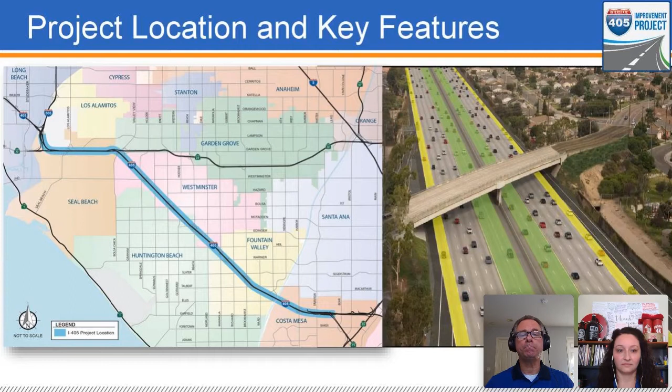Now I'd like to talk a little bit about the project benefits. We are, as part of this project, replacing 18 bridges. We are adding a connector between State Route 73 and 405 for the express lanes explicitly. And we're widening several bridges over roads like Beach Boulevard, Harbor Boulevard, and a couple of railroad crossings as well. All of the interchanges are going to be reconfigured. I'll talk a little bit more about Brookhurst's reconfiguration later on in the presentation.

There are merge lane improvements. We're making improvements to arterial streets. We're replacing a lot of sound walls throughout the project. We're building approximately 170 walls total. There'll be new bike lanes and sidewalks on most of the bridges, actually on every bridge, except at the very north end of the project. We will only have sidewalk on one side of the Bolsa Chica Bridge.

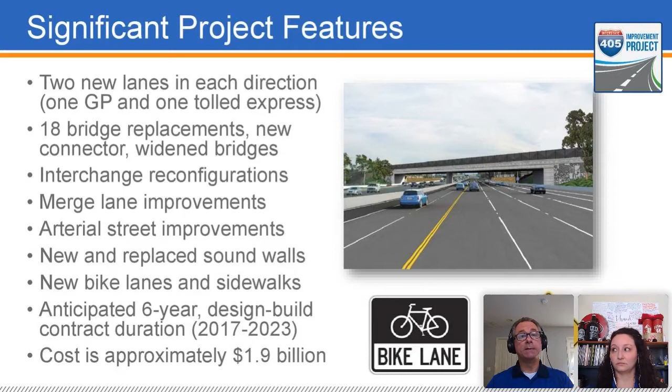This is a 6-year design build project. That means design and construction happen concurrently. Design is just about completed though, and we are about 40% of the way through the construction schedule as it stands. And the cost of the project is approximately $1.9 billion.

So now I want to talk a little bit about the bridge map. This is a document that we've included in the file section. It's a bridge map and fast facts. If you see that, it's actually a 2-page document.

On the front is a map like what you can see here, and it shows a graphic that represents what year construction is anticipated to begin for each bridge within the project limits, and whether that bridge is a 1-stage or 2-stage bridge. 2-stage bridges are open to traffic during construction.

The second sheet on the PDF that you have in the resources section details bridge by bridge the improvements that are going to be included in the new bridges. So it tells you whether it's going to go from X number of lanes, like 4 to 6, and talks about whether there are existing bike lanes or sidewalks in each direction, and what we have new. So it's a good resource.

So at this point, we've begun construction on the bridges shown in blue and purple. One of those, Slater, has been completed, as you know. Of the other bridges under construction, 3 are 1-stage, 3 are widenings, and 6 are 2-stage bridges.

And then we'll have another one under construction here soon. As I mentioned, Brookhurst, we will also have the Edinger Bridge under construction soon.

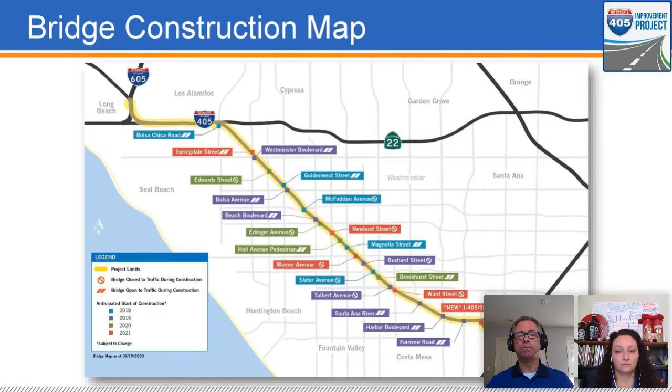At this point, I'd like to provide a bit of a construction update. These next several slides show activities from the last several months. More than 70 walls are under construction or completed.

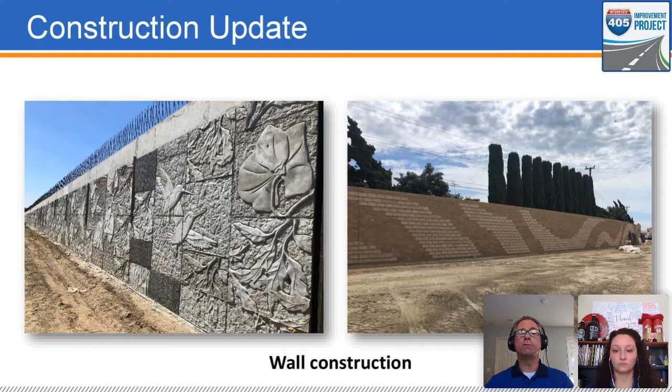These 2 photos reflect some of the aesthetic patterns being placed on retaining walls and sound walls.

This slide shows the Santa Ana River Bridge, which spans both the river and Euclid Street in Fountain Valley. This bridge is being widened using precast concrete girders.

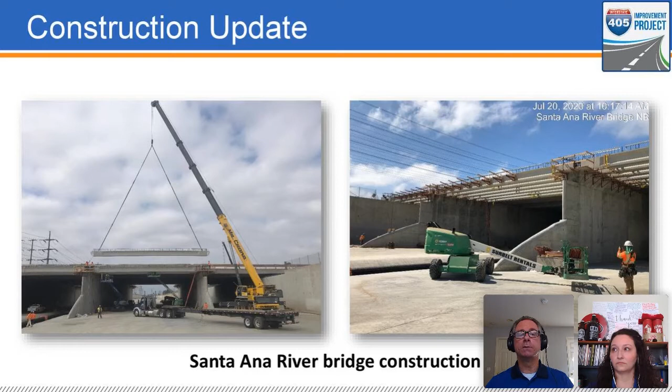This slide here shows drainage being installed in the photo on the left, and the reinforcing steel for a concrete barrier and concrete pavement in the photo on the right.

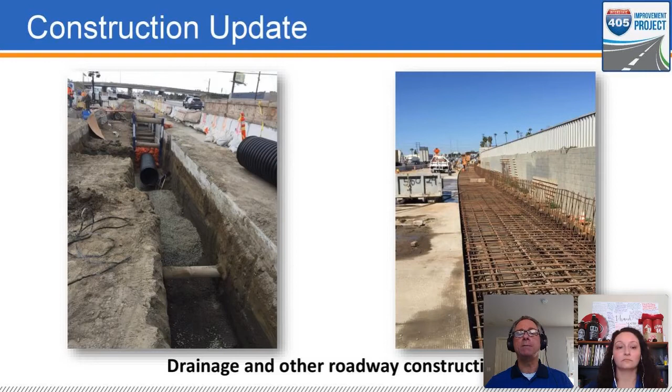These photos show bridge construction at Talbert Avenue and Westminster Boulevard. The photo on the left is of the false work at Talbert Bridge. We've advanced beyond that point. False work there is complete at this point, and they will begin in the near future pouring the actual superstructure of the bridge.

The photo on the right shows the placement of reinforcement steel that's inside the Westminster Bridge. All bridges are built this way. There's just a ton of steel reinforcement bar that goes in there. They pour the concrete, and it forms this bridge that lives up to current standards.

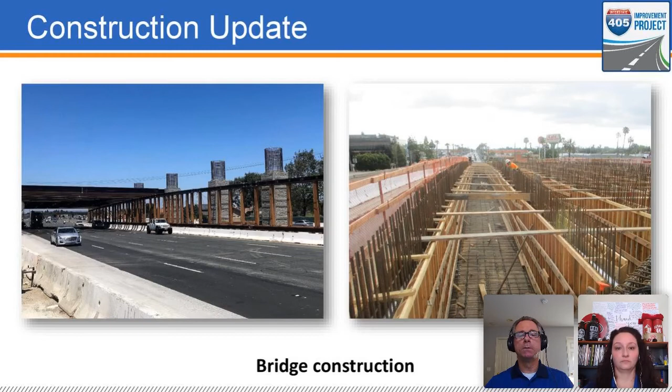Now I just want to look ahead a little bit for bridge construction. As you can see, and as I mentioned before, the project construction is more than 40% complete. The design builder has anywhere from 700 to 1,000 workers actively involved in the project on any given day.

We've opened the first halves of Magnolia Street Bridge, Bolsa Chica Road Bridge, and Goldenwest Street Bridge, and we did that earlier this year. And work on the second halves of those bridges has begun.

Work also is well underway to reconstruct the Heil Avenue pedestrian overcrossing. You'll see some activity there on the southbound side of the freeway in the coming weeks when they install a large cast-in drilled hole pile.

That's where they basically install this steel casing and excavate out the dirt that's within it and put a rebar cage, a reinforcement steel bar cage, inside that casing, and then pour concrete in. It's one of a couple of different ways to create the foundation for bridges, for bridge sides and bridge center columns. In the coming weeks, the McFadden Avenue and Bushard Street bridges are expected to fully open to traffic.

I'll talk more about Bushard in a second. And then work is set to begin on the Brookhurst Street Bridge, as we'll talk about today. And toward the end of the year, we expect the first phase of the Westminster Boulevard Bridge to open and the second phase to begin.

And looking into next year, Talbert Avenue Bridge is expected to fully open to traffic in spring. That'll be followed by demolition and reconstruction of the Ward Street Bridge. In addition, we anticipate the first phases of the Fairview Road and Bolsa Avenue bridges to open and work to begin on the second phases.

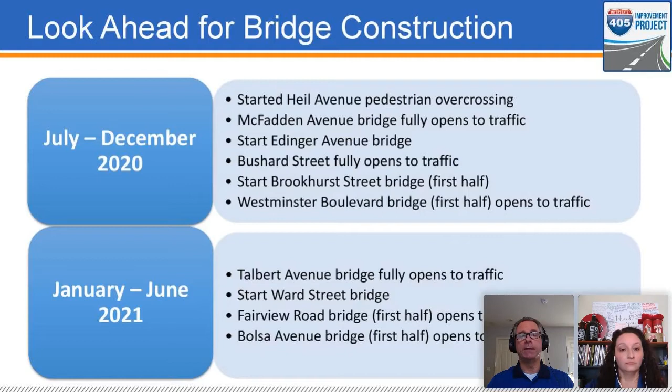Right now, I'd like to talk a little bit about Brookhurst. I'm going to take a sip of water first, though.

So OCTA and the contractor are always looking for ways to advance the construction schedule. We've worked closely with the City of Fountain Valley on this, and we've worked closely with all of our city partners, as well as Caltrans.

As part of this effort, the city has agreed that we can begin work on Brookhurst after the Bushard Street Bridge is completed. Bushard is set to open this coming Monday, October 12th.

Initially, the plan was to begin Brookhurst after both Bushard Street and Talbert Avenue bridges were completed. As part of this scheduled advancement effort, an analysis was done on the impacts to traffic of constructing the first phase of Brookhurst concurrently with completing construction at Talbert. That analysis showed concurrent construction would be feasible with Bushard open and with signal timing adjustments at area intersections, and the overlapping construction is only expected to last a few months.

As I mentioned earlier, the Talbert Bridge is anticipated to open in spring of 2021. It's also important to note that Brookhurst is a two-stage bridge that will be open to traffic during construction, with 2 lanes open in each direction for the duration of work. The anticipation is that each phase will take approximately 16 months to complete, so 16 months for each phase of Brookhurst. That's a conservative estimate, but we've learned over the last couple of years that we need to be conservative because there are a lot of things that can impact the construction schedule.

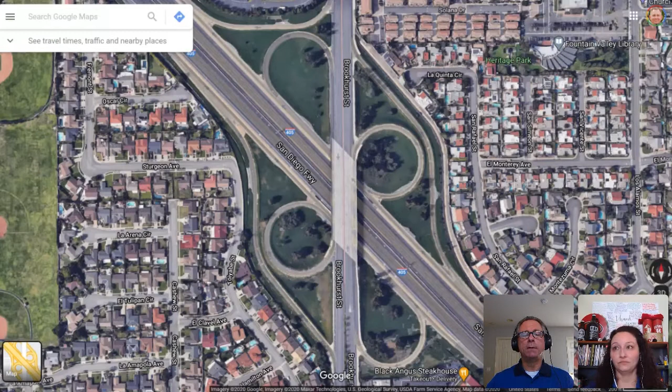All right, so this is the Brookhurst Interchange. I just want to make sure everybody can see it. As I mentioned, there is some activity going on right now, as you can see if you're out there, where they've removed the center median — that's the entire center median through here, and they're removing it all the way through the entire bridge. The plan is ultimately to shift traffic to the west side of the bridge, all the way through here, and there'll be 2 lanes of traffic in each direction.

As part of the work that's going to occur, this will happen Monday night into Tuesday morning. These loop off-ramps here are going to be eliminated — this one here, and this one up here. So those ramps get eliminated, and meanwhile they'll have temporary ramps here where you'll come off and be able to turn left or right. Actually, I apologize — only left from this ramp. This straight portion of the ramp stays, so you'll be able to go northbound on Brookhurst, but we're putting this extra temporary ramp in so you can turn left and go southbound on Brookhurst.

The same activity will be occurring here. So by the time everything opens up Tuesday morning, if you want to exit, you'll be exiting the freeway southbound here and be able to turn left to go with traffic northbound on Brookhurst. Again, these 2 ramps here will be eliminated, this one and this one up here, and that's to allow for safe movement of traffic and for construction of this side of the bridge.

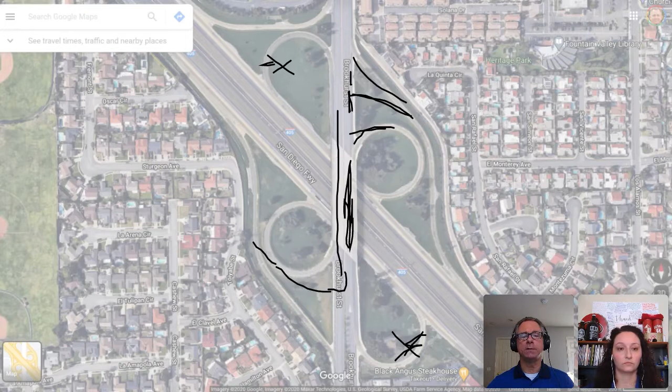They're creating a work area to do this side of the bridge. This loop on-ramp remains and you'll still have access to it — it'll be slightly realigned, so you'll be making a sharper turn to get on. The same applies here; I don't think there are any changes to this ramp, but it stays open as well. I'm going to leave this up, but mention a couple of other things as we move through here.

If you notice on the slide, I was talking about the demolition activity that's going to come next. Once traffic has been shifted, there will be a few days of pre-demolition work. That includes poking holes in the bridge deck and removing what's known as lost deck — the wood forms used during the initial construction of the bridge back in the 1960s. When you're doing bridge construction, the superstructure itself that you're driving on isn't one monolithic piece of concrete and steel — that would be too heavy and wouldn't be supportable. So there are cells created within the bridge, and wooden forms are used to create those cells.

Then the steel bars are put in there, and the concrete is poured around those cells. So you have these open spaces in the bridge, and that allows the bridge to be supportable. Once they remove that wood, they don't want it mixing in with the demolished material, because the demolished material is actually recycled — not the steel, but the concrete is taken to a batch plant nearby and recycled. So they don't want to mix wood in with that.

Once that work is done, the first half of the bridge will be demolished. The plan is for that work to occur over two weekends: first on the night of October 17th, and then again on the night of October 24th. These are tentative dates, but that's the plan at this point.

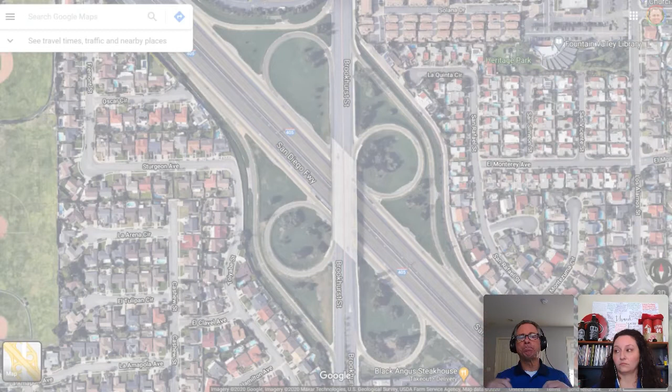In the case of bridge design here, what I want to talk about -- you see on your screen Brookhurst, and what you have is this loop off-ramp scenario. When they close these for the traffic shift, that's a permanent closure. These off-ramps are not coming back.

What's going to happen is this off-ramp is going to be reconstructed here, and it is going to come to a T intersection, where you'll be able to turn left or turn right from this off-ramp. These loop-on ramps will remain the same. Again, it'll be the same over here, where it'll come to a T intersection -- you'll be able to turn right or turn left, and that's the final permanent condition of the bridge.

This slip ramp will be removed. That's actually safer for motorists, bicyclists, and pedestrians.

Many of you, I know, have exited Brookhurst here, as I have, tried to get over to the left lane to turn left on Slater, and you're merging with a bunch of vehicles, maybe with a pedestrian you have to be watching out for, or bicyclists.

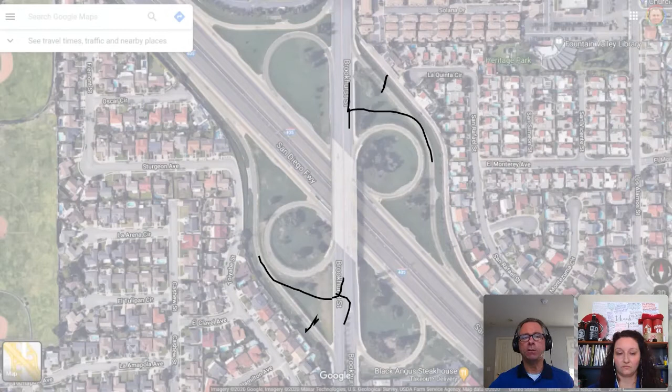This new design isn't entirely new, but implementing this type of design addresses that merging and weaving issue, and frankly, the increase in traffic on our streets and highways. That's the main element there.

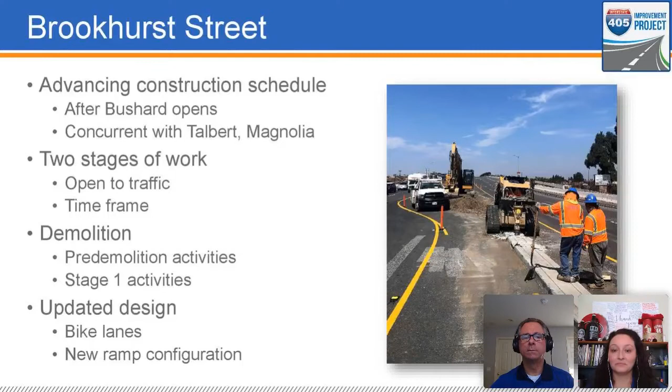So I went through this list of items. I want to talk a little bit about our engagement strategies. As you can see, we connect with the community in several ways. Many of you probably already receive a lot of our communications, in print and electronically.

While we prefer face-to-face discussions for major updates like this, we will continue conducting these meetings virtually for the foreseeable future. We strongly encourage you to sign up for bridge-specific updates by clicking the link under the Offers tab. Meanwhile, please use our interactive map at octa.net/405map and download our mobile app on the App Store or Google Play.

You can also find us on social media, and if you have a specific question or concern, you can call our project helplines or email us at 405project@octa.net. If we don't have an answer for you, we'll work with our colleagues on the technical team to get you one.

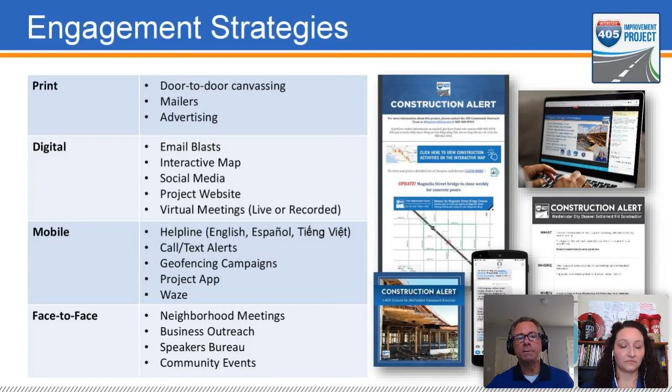We just have a few so far. Ty asked, when will the sound wall go up at the Talbert Brookhurst site? I'm not exactly sure which sound wall, there are so many. It would be good, Ty, if you could email us directly with your address so we can locate specifically which sound wall you're interested in, and then we can provide you that information directly.

Our next question is from Mike regarding the McFadden Bridge. Mike asks, what exact date is McFadden anticipated to open? The only dates I'm comfortable with right now are that on October 12th, everything looks on schedule, striping included, for Brookhurst... sorry, Bushard to open. That's October 12th, and then the anticipation, according to the contractor, is that we'll move to work on Brookhurst.

I'm going to say we're really prepping for just right around mid-October, so you can guess which day that is for the McFadden opening. Follow us on social media, we're talking a little bit about it via some videos we have. We're really excited about it opening, but I can't give an exact date at this point, but I'll say mid-October.

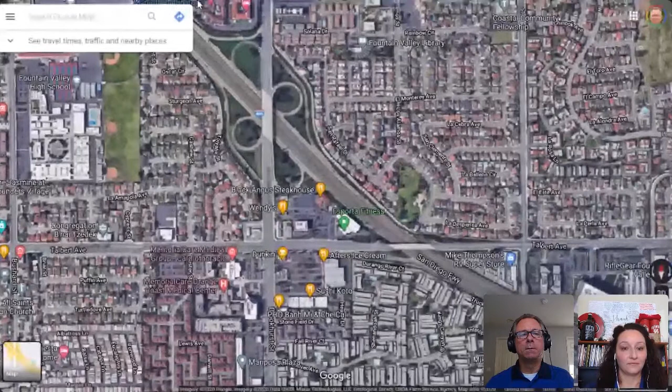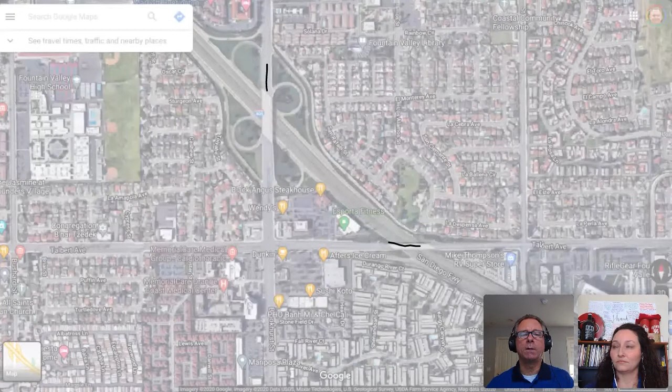If I'm not mistaken, the question is regarding the sound wall between Talbert and Brookhurst, all the way along here. I think the sound wall ends about here, and then there's a separate retaining wall that continues. If that's the wall you're talking about, I believe that's 2021. We don't have specifics memorized, but we'll try to get a more specific schedule from the contractor and get back to you.

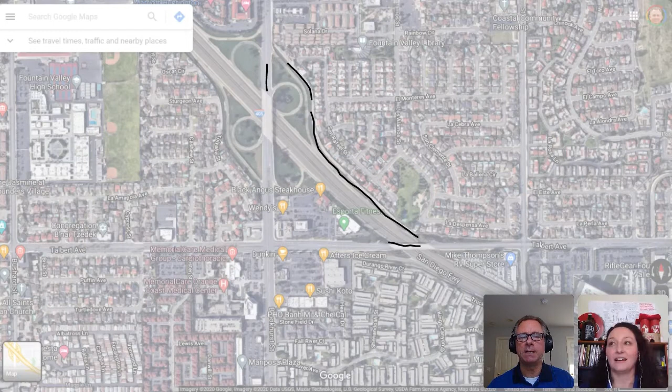I think the whiteboard drawing is off a little bit. I'm not sure if you can see that. It doesn't look like it to me, but okay. We're talking about the wall on the northbound side between Talbert and Brookhurst, along the freeway there. Correct, along the freeway.

Our next question is from Min. Min asks, how many lanes will the off-ramp exit have, for the Brookhurst exit on the 405 northbound? I can actually bring that up for you. Give me a second. Meanwhile, if there's another question, I'll take a look at that as well.

Actually, I have the information here, so Min, I can answer that for both directions. Let me orient this correctly. The northbound off-ramp is going to have 4 lanes, 2 left turn lanes and 2 right turn lanes. The southbound off-ramp will be identical. So each of the off-ramps will have 2 left turn and 2 right turn lanes. Thank you, Min.

Our next question is from Tom. Tom says, I noticed closure of Talbert increased traffic on Brookhurst and Slater significantly. Will opening Bushard relieve this at all, or are we anticipating further traffic impacts due to the Brookhurst construction? Opening Bushard will ease this, yes definitely. There's an analysis done of the impacts to traffic when we have this concurrent work going on between Brookhurst and Talbert, and we do anticipate that Bushard opening will ease some of that.

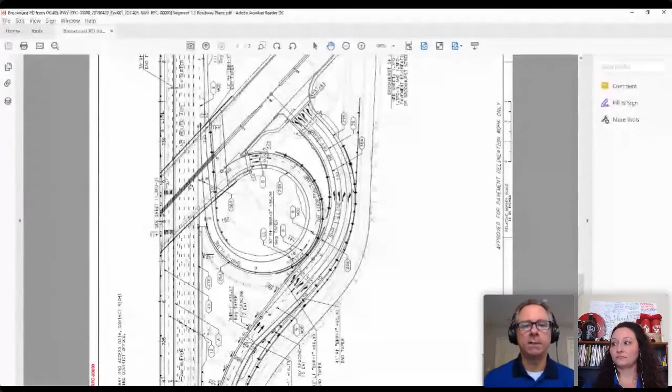I'm going to share this screen with you, and this might address Yoshi's question as well about plans—these are the kinds of things that we look at. Give us a second here. Hopefully you can all see this, though I don't think I'm able to zoom in too closely.

This is the new off-ramp from northbound—team, tell me if I'm missing something. These dark gray lines mark the new ramp, and the light gray lines—let me see if I can zoom in a bit, I might need to reshare the screen.

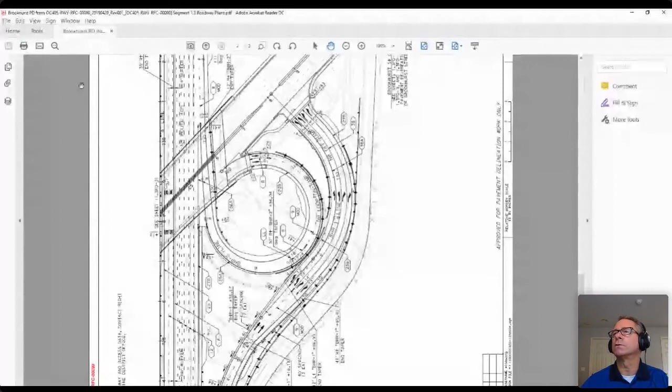It looks like it's zooming in, maybe a little bit too much.

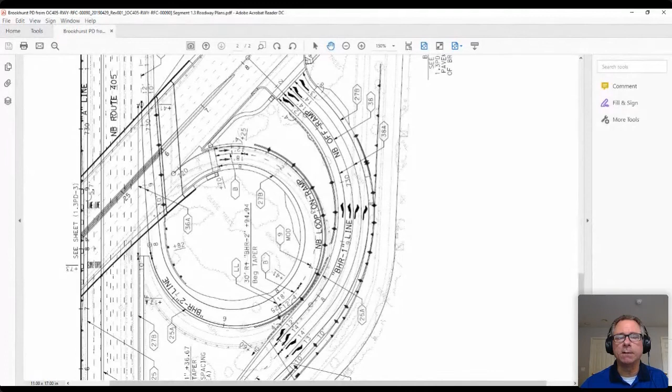So these light gray lines are the original off-ramp. The off-ramp is being widened a little bit to the right here. And the existing on-ramp is changing too. The new on-ramp will be a little bit of a tighter loop. The old one is sort of under here. I'll try to zoom in a little bit more to give you a sense of the difference between the two.

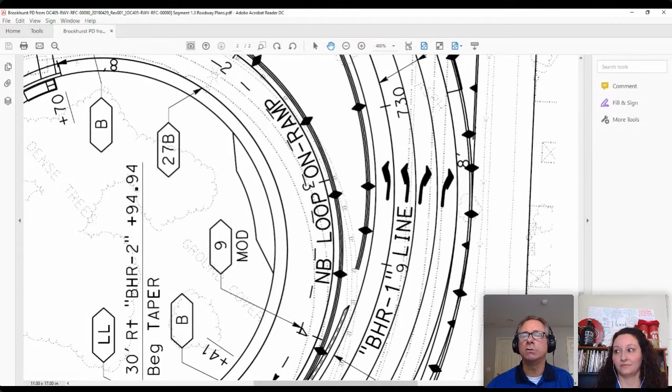Right, so you can see here's the existing off-ramp, these light gray lines, and here's the new one. It's going to be a little bit wider, coming right to the right-of-way. This is the channel that's right behind the state right-of-way. Here's the on-ramp, and the light gray lines are the existing on-ramp, and it's going to tighten up and change just a little bit. I hope this is helpful for folks.

You can kind of see over here on the right side, though you probably don't know what I'm pointing at because I don't have my whiteboard on, but on the right side is where houses are. I believe this black line indicates... I'm not sure what that indicates, to tell you the truth, but I know the right-of-way line is in here. So, as I was talking about, let me clear that and show you again.

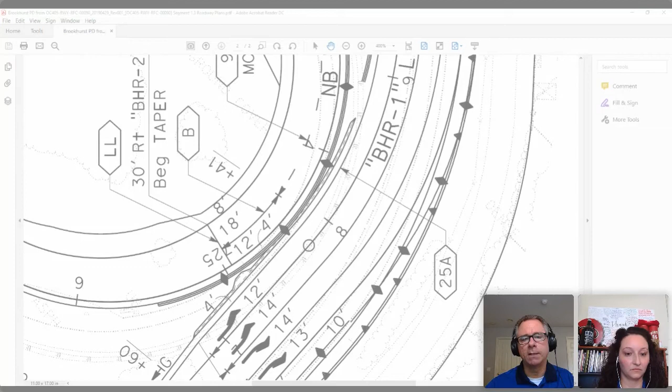So these dark lines right here are the new lanes for the off-ramp. You've got 1, 2 - my drawing is terrible here - 3. There must be a 4th one here, sorry. So there you go, those are the 4 lanes.

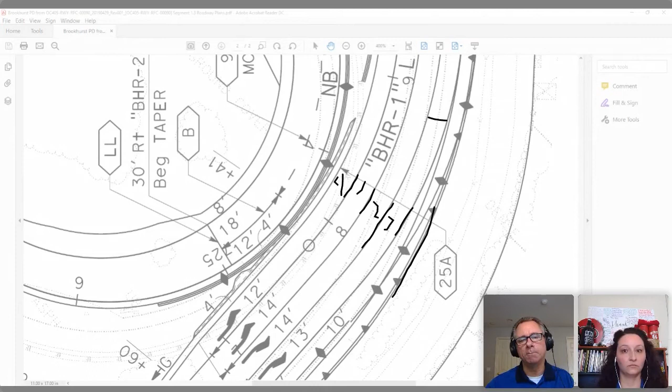And you've got a wall that's right here. This is indicative of a retaining wall that's going to be built to support it. So it may come a little closer, but not too much closer to the house. These lanes are typically 12 feet, so we're talking about 12 feet with a 10-foot shoulder. This is a 10-foot shoulder right here.